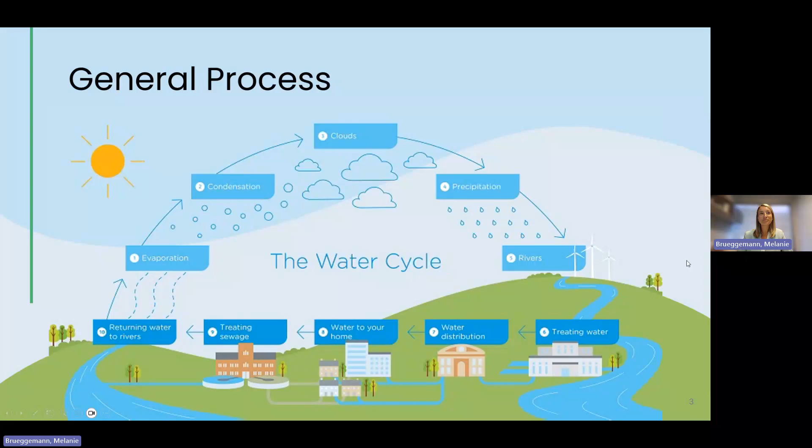When we get to water and sewer, ownership becomes a question. Most of the time our water and sewer is owned by the public, meaning the city, county, or a local authority. There are a few times we get into private ownership, such as when a developer has installed a water and sewer system for a neighborhood. Sometimes the HOA may own it, and other times the homeowner may own it, but most of the time it's public ownership.

For sewer, the homeowner owns all the way to the main line. Sometimes a utility's sewer ownership extends to the public right of way, but it can get tricky since you don't always know exactly where the right of way is, and owners sometimes dispute that. So most of the time, the homeowner owns all the way to the mainline connection.

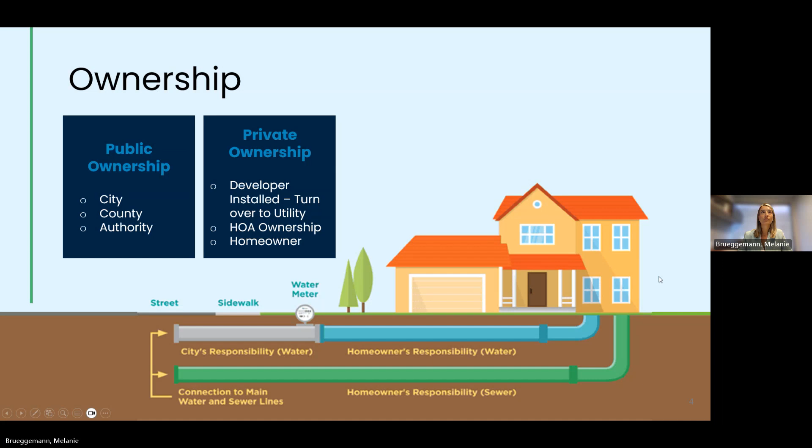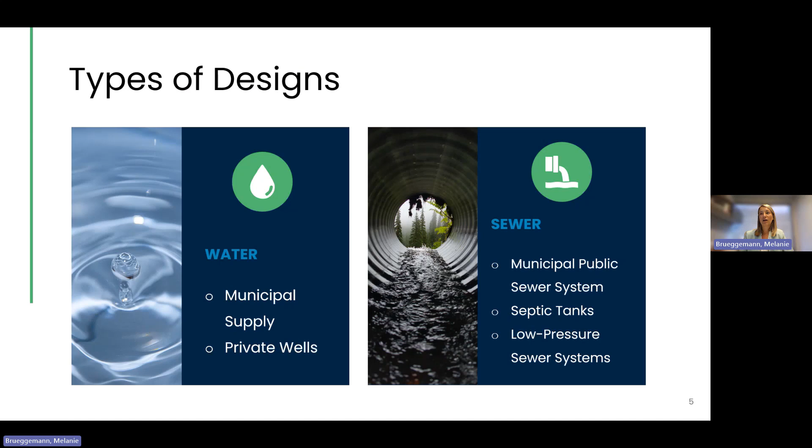Some types of designs that we'll go over include water, which is municipal supply and private wells, and sewer, the municipal public sewer system, septic tanks, and I'll briefly go over low pressure sewer systems.

When we get to the water system, there's different ways to design this and different types of designs. The first one we look at is water treatment plants. There's a lot that goes into designing these, but for the most part, most include pulling water out of a reservoir, lake, or river, and then a treatment process of sedimentation.

We are going to filter it, and there are a lot of different ways to filter the water, whether it's through old school gravity sand filters or through membrane technology, which is what a lot of people are going to. Then we disinfect the water, and it usually gets pumped out to tanks within the system, which is how it gets into what we call the distribution system.

When we're designing pumps, we need to design to meet a specific pressure within the water system. With that water system, you have two different types of pressures: one is the domestic pressure, which is what you get out of your faucet, and another is for fire flows, which is what comes out of our hydrants. So we design our pumps to meet those two pressures.

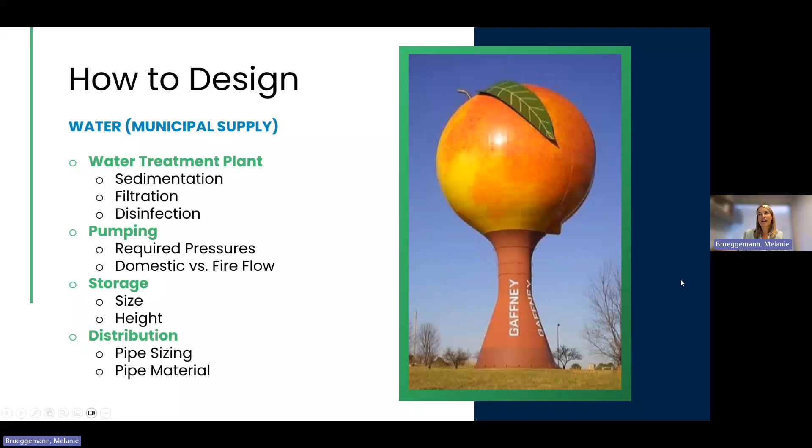For the distribution system, when we're designing it, that mostly includes all of your pipes going to the houses and maybe a few booster pump stations throughout the system. We have to size the pipes based on the amount of flow, and the pipe material is something we design, which a lot of times is based on what the actual utility would prefer. So most of the time it will be ductile iron or PVC.

Some constraints you may come across as an elected official or someone involved with water and wastewater distribution and collection systems is water treatment plants. If you plan to design a brand new water treatment plant, it needs to be located near a supply, whether that's a river or a lake. A lot of times now, if we can't get close enough to a river or lake, we're having to build very large reservoirs and pump the water from the river or lake all the way to the reservoir. For example, that just happened in Paulding County—they opened a very large reservoir.

Another thing that becomes a constraint when designing a water treatment plant is droughts. We have to monitor those and understand how we store water in a drought season. As water and sewer people, the state puts the hammer down when we're in a drought season to conserve water, and that ends up affecting your local citizens. So that's another constraint we have to look at when designing water treatment plants.

When designing distribution systems, some constraints we have are the pressures. We have to maintain a specific pressure throughout the system, and we have to make sure we have enough redundancy so that if there's a water main break, a whole county or city isn't out of water. But those are the main constraints to think about whenever you're looking at the water system.

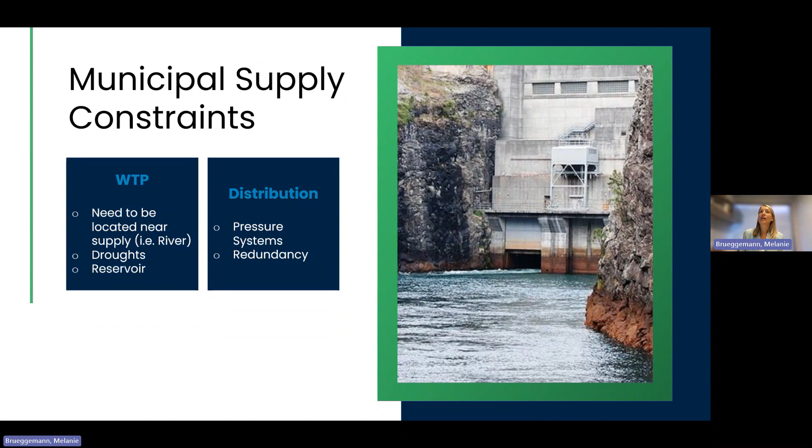Now we're going to go into water wells. Some people, if they aren't on a public water system, will have a water well. These are typically in rural areas, and they utilize groundwater with a filter casing, almost similar to a water treatment plant, but on a much, much smaller scale. So if you're in a rural area and most of your residents are on a well, this is what it would look like.

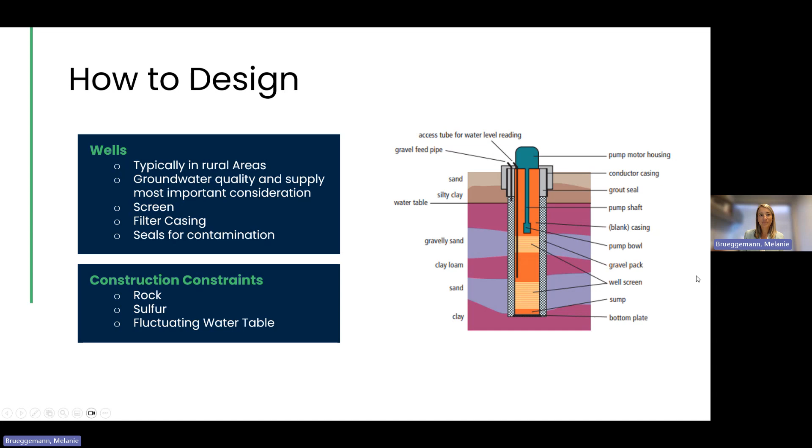Some constraints with wells are that it's really hard to dig a well when you have a lot of rock. Sometimes sulfur will make the water have a bad smell and an odd taste. And if you have a fluctuating water table, this also limits how you can get a well.

Now we'll move on to sewer. When we're designing a sewer, we look at a collection system, which is the piping that goes from people's houses all the way to the wastewater plant. We need to look at pipe material, which is mostly based on the utility and their standards. Another portion of the design is whether we're flowing the sewer by gravity or pumping it.

We prefer not to pump it, since that requires a lot of energy and a lot of operation and maintenance costs. Gravity sewers flow by themselves for the most part. If they get clogged or backed up, it just requires a one-time cleaning, whereas with pumped systems, it's being pumped all the time. The pumps get a lot of rags, or the flushable wipes that are actually not flushable, clogging them. So that becomes a little bit more difficult.

When we're designing the pumping system, we need to look at the force main. We have to size our force mains based on the flow and the velocity. We like to keep those self-cleansing, so we don't have to clean them out often.

When designing the pump station, we also have to think about rain events. Rain sometimes gets into our pipes, which is called I&I, infiltration and inflow. During rain events, our pumps at the pump stations have to pump way more than they typically do on an average dry day. So we have to design pump stations for both low flow and high flow scenarios.

Again, I&I, infiltration and inflow, we do get those in our sewer system. Everything's underground, so we don't necessarily see all the small cracks, or maybe sometimes you might get a manhole that has holes on the top. That's where we get our infiltration and inflow.

When we get to a wastewater treatment plant, we have to design for that too. It usually includes some sort of screening, which takes out all the trash, because even though it's a sewer, we still accumulate quite a bit of trash. So we typically have to screen our wastewater when it gets to the plant, and we take that trash to a landfill.

Once we get there, depending on what kind of system you have, it's typically a biological type system. We have to aerate the sewer, and then it goes to clarifiers where the solids settle out, and we get cleaner water that skims off the top. From there, we typically do disinfection before it goes back into the rivers.

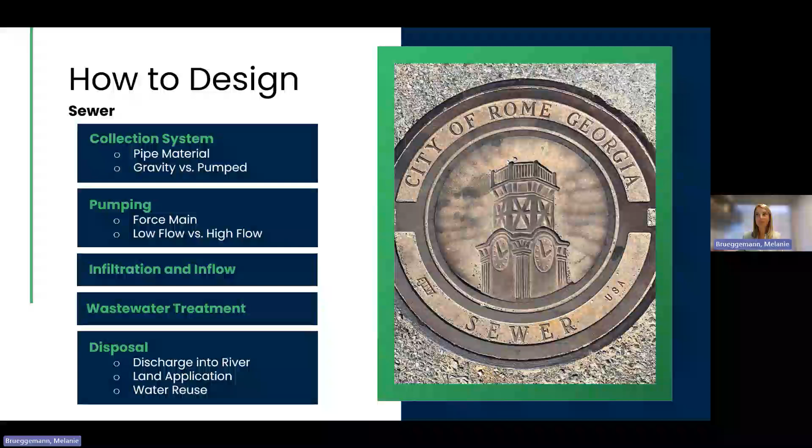Another way to dispose of the wastewater is water reuse. Paulding County, for example, has a water reuse program where they take treated wastewater and use it for irrigation in certain locations. The wastewater discharged there has to be disinfected to a certain degree for water reuse, but yes, it can go to irrigation. They irrigate a few golf courses with their treated wastewater.

Some typical constraints with sewer: your wastewater treatment plant needs to be located near a river for discharge. If it's not, then you have a really high pumping cost to pump it to the river or stream, which makes it a little bit more difficult.

One constraint most of you may know is where you place a wastewater treatment plant in neighborhoods. You have a lot of complaining citizens and residents who may not like the smell and odor, so it's kind of hard to find specific locations for wastewater plants. You also want it to be in a centralized location, and a lot of times they are located at the lowest point so that gravity sewer can make its way to the wastewater plant. But you want to make sure it's not so far away that you're pumping sewer for miles and miles to get there.

With land application, you don't want to do it if you have very steep slopes, because that creates erosion, which is not great for our environment. It's also very difficult to have land application if you have rock, because the wastewater does not seep into the ground like you would like it to.

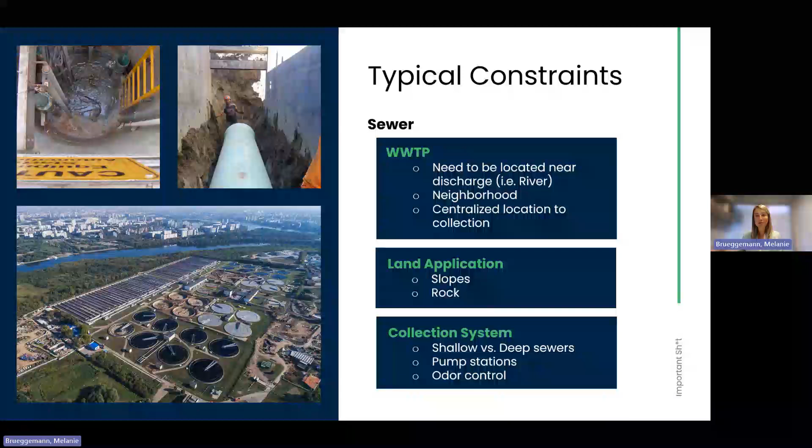Lastly, for both the wastewater treatment plant and the collection system, there's odor control - making sure your residents aren't smelling the sewer on a day-to-day basis in your sewer system.

Real quick, I don't want to get too in the weeds, but when we design a water and sewer system, we're designing it based on some assumptions. For the most part, we're designing water based on what our residential flow rate is, which is a gallon per day per capita - essentially per person. We also have to assume how many people are in each household. There are a lot of assumptions there, but some people have very sophisticated, existing data we can use. It used to be 100 gallons per day per capita, but it's starting to look closer to about 67 gallons per day per capita, based on low flow toilets and all these water-saving technologies.

Fire flows - a lot of times we're designing based off of the design constraints: 500 gallons per minute in rural communities, 1,000 gallons per minute in urban communities, and 2,000 gallons per minute for large developments or industrial sites. We have to have a design fire flow at that rate for an hour.

Sewers, we typically design them to be 60 to 85% of the used water, knowing that pretty much if you're at your house and you're running your dishwasher and your sink and your laundry, that pretty much all of that water goes to the wastewater system. So you're only consuming about 5 to 10%.

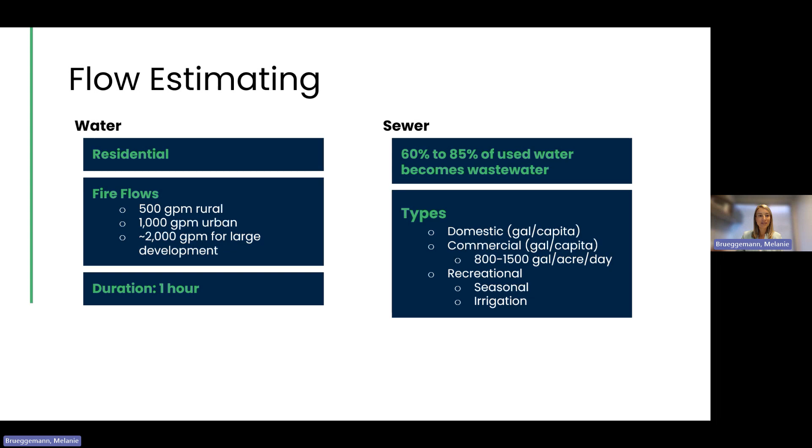A few other design considerations to think about is permitting. If you are doing a water or wastewater permit, you do have to get the withdrawal permit or a discharge permit, and those take a very long time to get from Georgia EPD. There's a lot of testing of the rivers and lakes that you're pulling water from or discharging wastewater to, so those do take a long time.

We do have to make sure that when we're doing any clearing or anything like that for our projects that we're looking at protected species.

GDOT permits - if we're putting anything in GDOT right of way, we have to get a permit for those utilities. Creek crossings, we have to get specific permits from United States Army Corps of Engineers for that. And all of that takes a lot of time, and we have to coordinate with other utilities like Georgia Power and AT&T Fiber - you're always having to work with other utilities since it is kind of a mess under the ground.

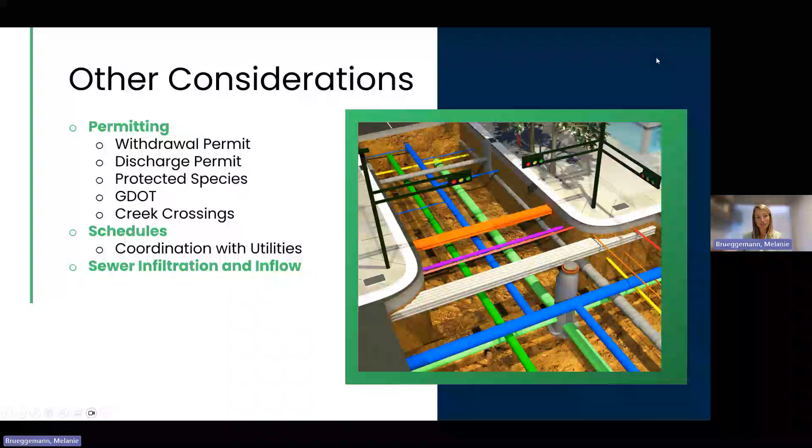And then sewer infiltration and inflow, we're always kind of having to deal with that as our infrastructure ages and we're having some more issues.

So some big takeaways: you need to understand your local planning - who owns the water and wastewater system, whether it's your state, your county, or your local authority. And if you are buying or selling water to other communities, you might need to know who's involved in where your water supply is coming from.

We have to utilize accurate capacities. So if you're planning a community or planning a development, or know that there's areas of your community that might be growing or developed, kind of converting that land planning into water and sewer planning - understanding, is this going to be an industrial site? Is this going to be a residential site? And then planning accordingly for that.

And then review constraints. Sometimes I get a lot of land planners that will want to go up and say, oh, we think that development would be great in the north part of the county. And I'm like, it's completely all rock up there, so it would be very expensive to get water and sewer up there - that's just not going to happen. So kind of understanding your geological constraints, the location of your water and sewer system, permitting constraints, topography, and capacity of how much water and sewer is actually available from your utility to serve those areas.

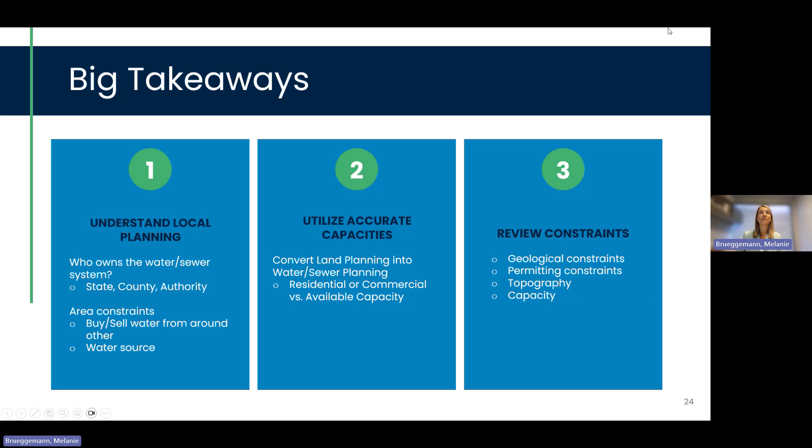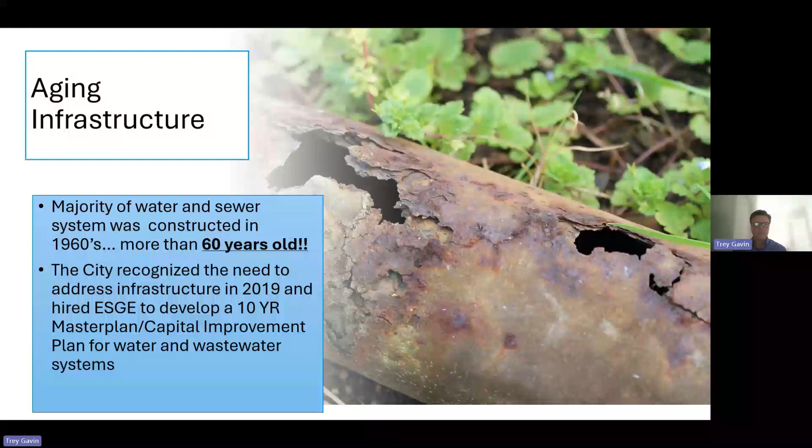The city recognized the need to address this snowballing infrastructure situation around 2019 and worked with ESG Engineering to develop a 10-year master plan, capital improvement plan for water and wastewater systems. This does jive with some of the comprehensive planning that the city and Ware County had joined together for, both a regional water plan and the updated joint comprehensive plan.

You can see here planning concepts that moved into proposed projects within that plan were hitting all around water, wastewater, street and drainage, so we would start to address some of the capital improvement program items that were listed. We continue to address deteriorations and make capital upgrades, ensuring community facilities have adequate water and wastewater. Additionally, there was a goal to extend water, sewer, and other utilities to the industrial park and other areas suited to economic development. So we did have an economic development driver as well within the planning.

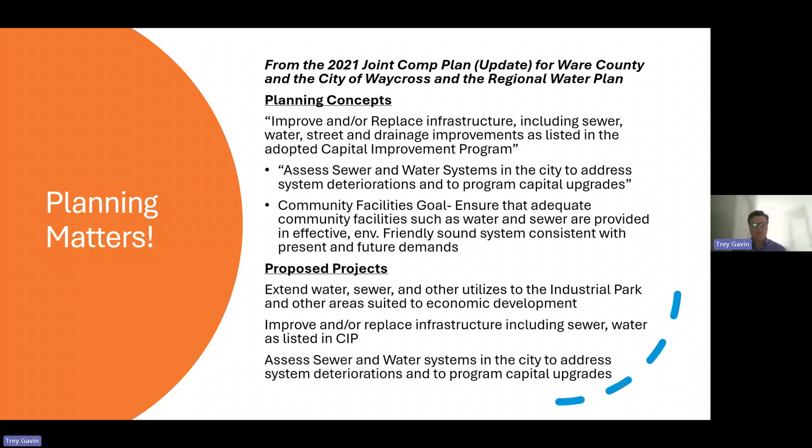The city has had a declining population for quite some time, and so there's not a whole lot of focus on growth. We had a couple of growth slash redundancy measures here, but looking at potential regulatory issues we might be facing over the next 10 years, plus looking at concepts for rehabilitating many systems in need. We also had a yearly rehabilitation budget built in, whereby we would start to address old hydrants and valves, replacing those for obvious reasons, and also infiltration and inflow reduction projects, which Melanie described very well a bit ago.

We all know that these systems aren't getting any better with time. We've just got to start addressing this on an ongoing basis, either on an annual budget perspective or as a big capital project. So in this case, we kind of programmed it with all the other needs - we programmed these particular needs like an annual budget.

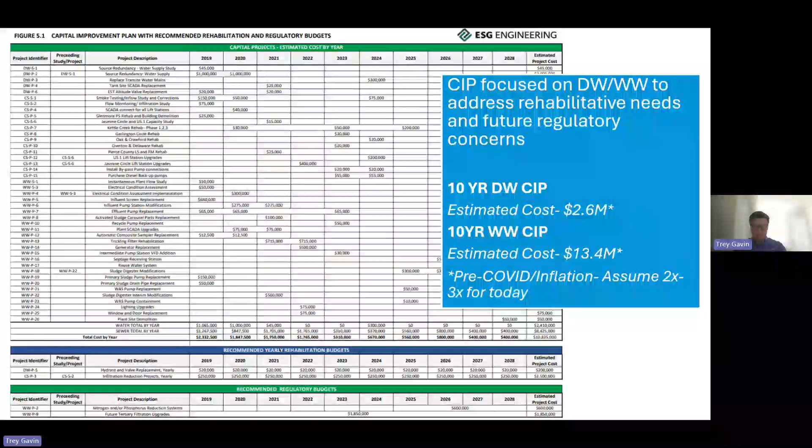So the key projects that came out of this exercise that were high priority for us to face, both from a technical perspective for engineering and also from a funding perspective - planning's finished, now we're into the nuts and bolts of how to make it happen.

On drinking water, an interconnecting pipeline between what we call the city system and the industrial park system that would provide source and delivery redundancy was a key project on the drinking water side. For this particular project, we have two different permitted systems that are disconnected by several miles.

In this case, we recognized the need to move water back and forth rapidly and provide redundancy and additional source water capacity to the city system. This project was planned as a high priority: expand source water capacity through a new well field, SCADA improvements, and an ongoing effort to replace undersized and leaky mains. Both capacity and non-revenue water losses are issues, tracking mostly with mains that are still asbestos cement, which we want out of the system, and galvanized pipe, which many cities and counties suffer from.

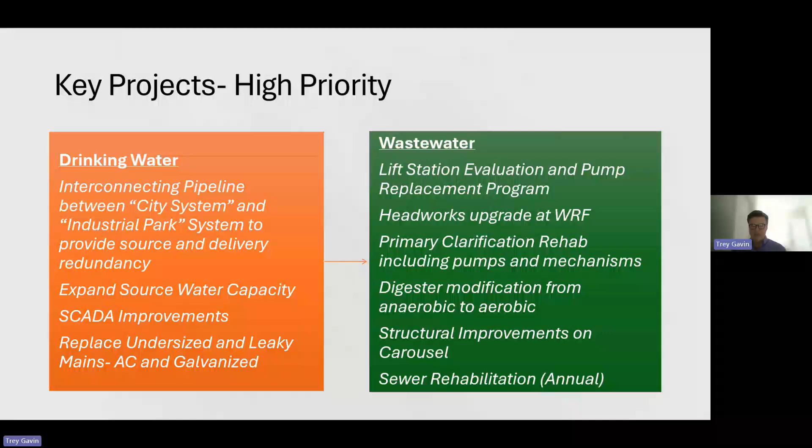Our funding strategy was a multi-year, multi-tiered process that started in 2020 with a pre-application. Many of you have utilized GEFA funding, and if labeled as a disadvantaged community, hopefully you've received principal forgiveness. You can see the projects listed on the right-hand side of this table. The big takeaway is that our specific strategy led to $5.625 million in grant funding for $12 million worth of work, which is pretty amazing in this marketplace—about 45% grant coverage—again addressing the highest priority projects determined from the planning process, which is key.

ESG Engineering also completed a rate study that included both a rate increase recommendation and some impact fees—a dirty word in our business, but really system development charges—that would give the city, as it grows, which has happened in recent years, the ability to offset some capital costs through a system development charge process.

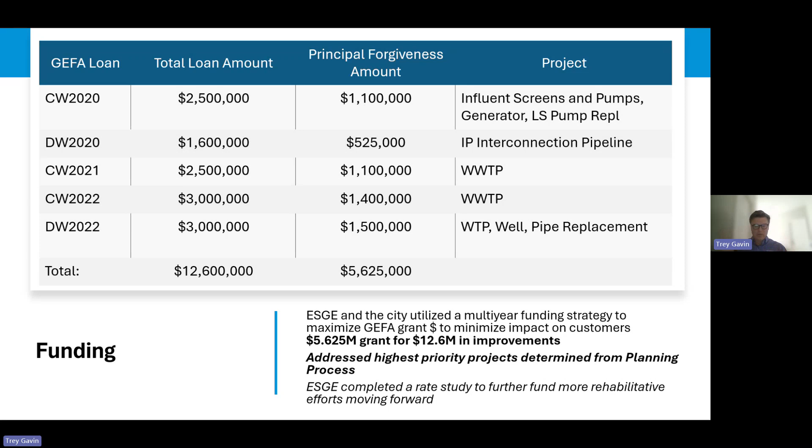Project status, a quick update: the interconnecting pipe and pump design is complete, and we're hoping for a bid opening soon in Q3. The wellfield expansion and water treatment facility rehabilitation design may be starting soon. On the wastewater side, 2 of 3 phases of the wastewater treatment facility have been improved and rehabilitated; we're moving through the last phase now and will be ready to bid that. The lift station evaluation and pump replacement project is complete.

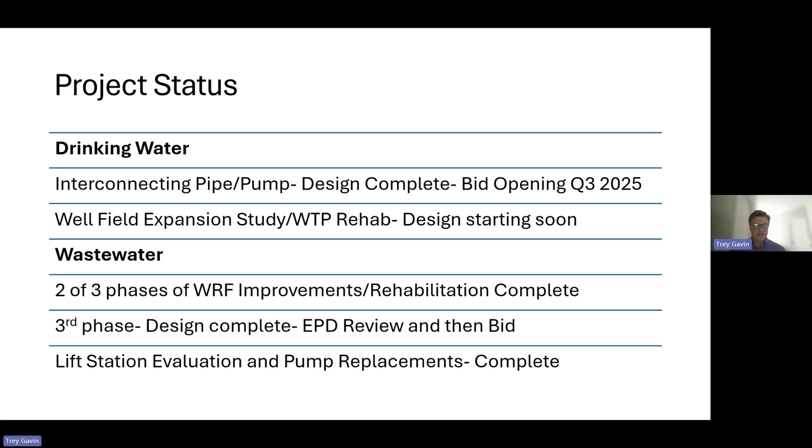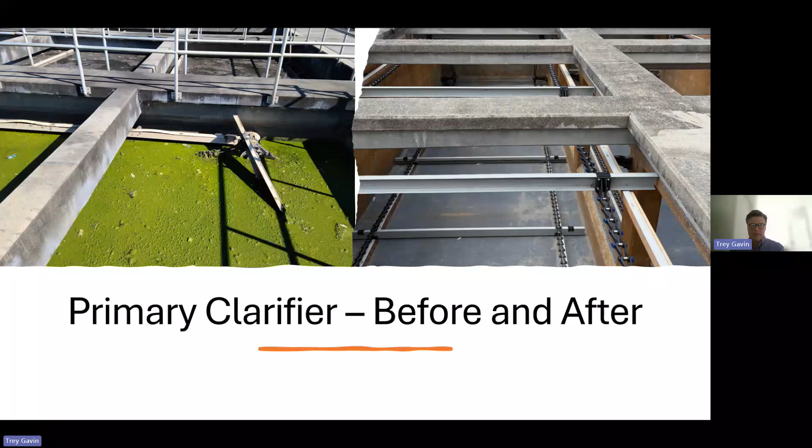Just some quick before and after pictures. The primary clarifier pictures look bad because it was out of service and left sitting, but it's a very nice rehabilitation—non-operational to now operational. This shows some of the work going in: new generator, new screens that made a huge difference to the wastewater plant, fine screening, head house and digester piping replacement, and new conduit duct bank.

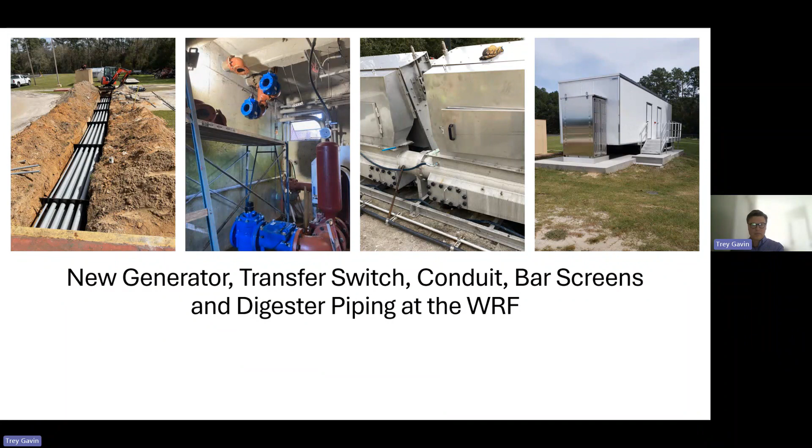Challenges we faced on these projects: COVID-19 made things very difficult, both from typical bottlenecks everyone recognized, and from the inability to get labor to the job site for bid day. We bid it three times—the first two had no takers, and on the third we finally received bids from two contractors. Really tough—maybe my hardest bid day challenges in my 28-year career.

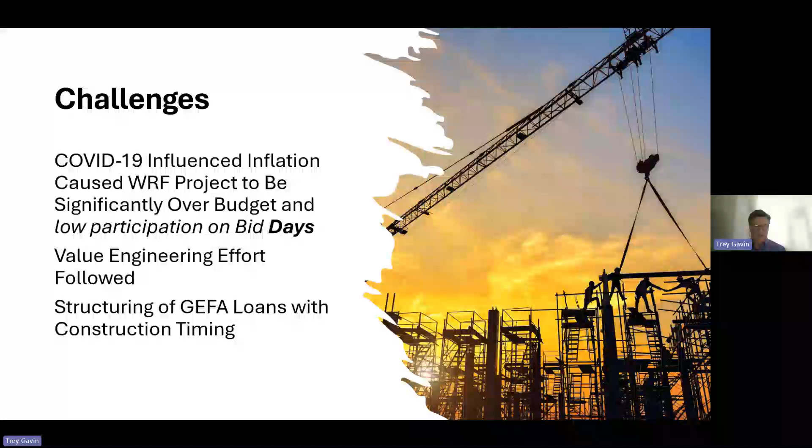The value engineering effort came after we busted budget due to inflationary issues at the time on the first two phases of work. We did value engineering and got the project flowing again, now set up for the third phase within an overall budget structure. The GEFA loans—doing work at the wastewater plant through three different GEFA loan and grant combinations—provided challenges on construction timing and usability of funds.

Our overall takeaway from this effort with the city is that the comprehensive planning process worked. Our community partners—whether GEFA, the South Georgia RC, or the DCA initiative through the Plan First community concept—helped us construct meaningful projects for the city of Waycross, and a lot of these are still ongoing.

Probably we'll have an update to this capital plan in the next year or two, trying to keep up with it. The overall takeaway from this project structure is that this overall effort supports the regional initiatives for growth and economic development. We're always trying to have better facilities, more reliable facilities, and more redundancy, and this one checks all of these boxes along with supporting economic and regional efforts.

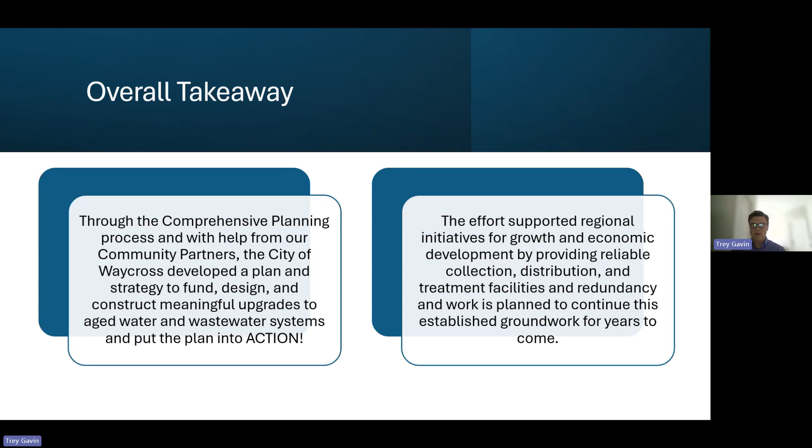And then just to talk about our city partners, as I said, DCA, South Georgia RC, GEFA all participated in some way. We were the engineers. Inframark operates the wastewater and water facilities for the city of Waycross. And of course the commissioners, Mr. Rayford the city manager, the planning department with Mark, and the mayor have all been big supporters of this work. We're awfully proud of being involved and continuing to promote the city of Waycross across the region.

That's great, Trey. Really appreciate you speaking on that. Great projects. I'd also just like to put a fine point on unashamedly plugging the Plan First program, which is another program that I manage.

The numbers that I have on two of the loans from GEFA, as DCA shares a strong partnership with the Georgia Environmental Finance Authority, we have offered a 0.5% reduction on GEFA interest loans. So what I saw was that out of the two loans of $3 million over 20 years, that 0.5% reduction, because Waycross was a Plan First community, they're saving roughly $164,000 over 20 years, and that's real money. If you're a planning director, that's certainly more than your salary. Great job with the city of Waycross partnering with the Southern Georgia Regional Commission in accessing that Plan First incentive, and great job to you, Trey. Thanks for explaining what you guys have done, really improving the water quality over there in Waycross.

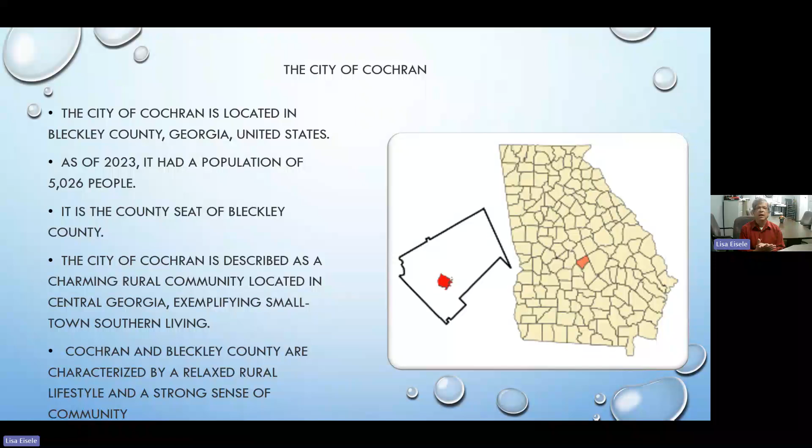A little bit about the city of Cochran. We're located in Bleckley County, Georgia. We're about 40 miles southeast of Macon, about 30 miles west of Dublin, really just south of Warner Robins. We're a little over 5 square miles, with a population of a little over 5,000 people, and we're the only incorporated city in Bleckley County. We're a charming rural community with a relaxed rural lifestyle, yet we have our challenges with water and sewer.

Similar to Waycross and other municipalities that have reported, we have a waste treatment facility where we've had a great deal of inflow and infiltration. But a little bit about our plant: it's a modern tertiary plant built in 2002. We process about 430,000 gallons per day. We have SBRs, or sequencing batch reactors, filters, and we do have UV disinfection on site. That was installed about 10 years ago.

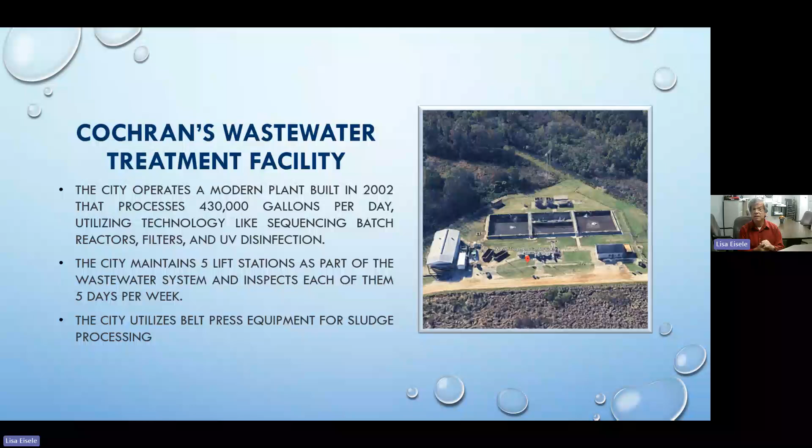We maintain 5 lift stations as part of the wastewater system, and we inspect each of the lift stations every morning, 5 days per week. Our dewatering is through a belt press. We don't have a screw press, but we have a belt press that we use for dewatering.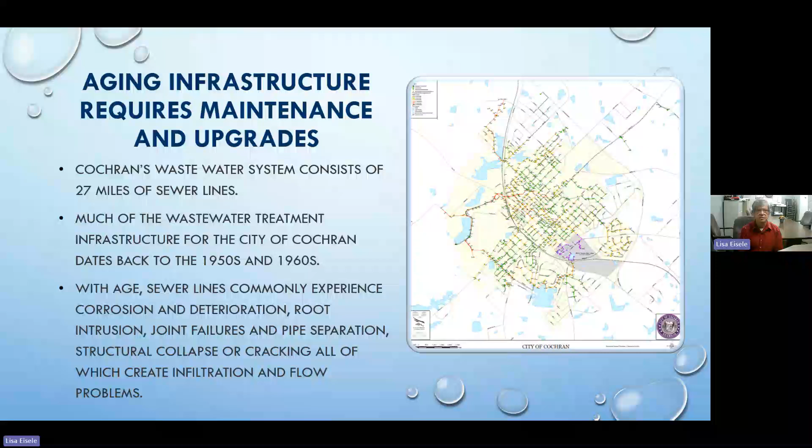Total in Cochran, there's a map of the city. We have 27 miles of sewer lines. Much of the waste treatment infrastructure, similar to other cities, was built in the 1950s and 60s, not too long after World War II. With age, sewer lines commonly experience corrosion. We've had joint failures, pipe separation, and just like the picture from Waycross, just a deterioration of our sewer lines. And so we really have grappled with how to best approach this.

It's been a goal in our community work program in our 2016 Cochran-Bleckley County comprehensive plan, and then again in our 5-year update in 2021, to conduct and repair our sewer system.

In 2018, the city of Cochran completed a comprehensive condition assessment of all 27 miles of sewer collection in town. Falcon Design and Consultants, out of Stockbridge, have been our consulting engineer for a little over 11 years.

We did a complete comprehensive condition assessment. It was a very thorough assessment of the location of all our manholes and the condition of our sewer lines. I know in city of Rome it was reported earlier that they discovered holes in manhole covers. Well, in the city of Cochran, I don't like to boast, but we discovered some manholes we didn't even know about. There were a couple that were surprising.

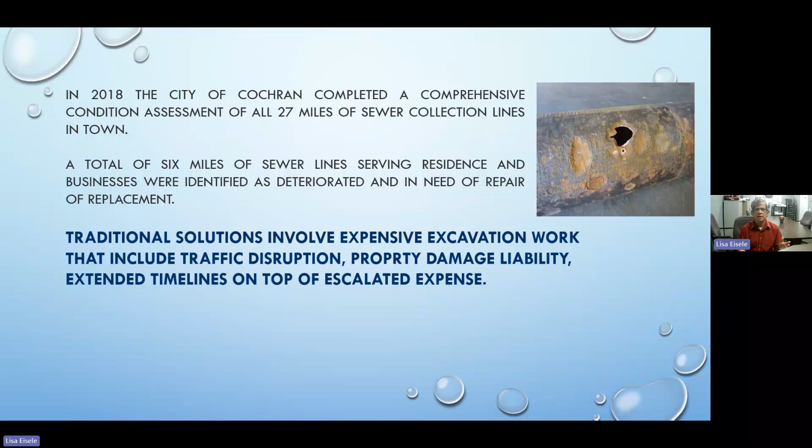We identified 6 miles of sewer lines serving residences and businesses that were deteriorated and in need of repair and replacement. So we looked at traditional work of replacing the lines. That's a lot of excavation, includes traffic disruption, property damage, and a lot of expense.

But then we pursued what has been around for a while now, slip lining and cured-in-place pipe. This isn't new among cities and counties, but it was new for the city of Cochran in 2018. We pursued the trenchless pipe rehabilitation method, approaching it as a geothermal compound that would be pumped into the deteriorated sewer lines.

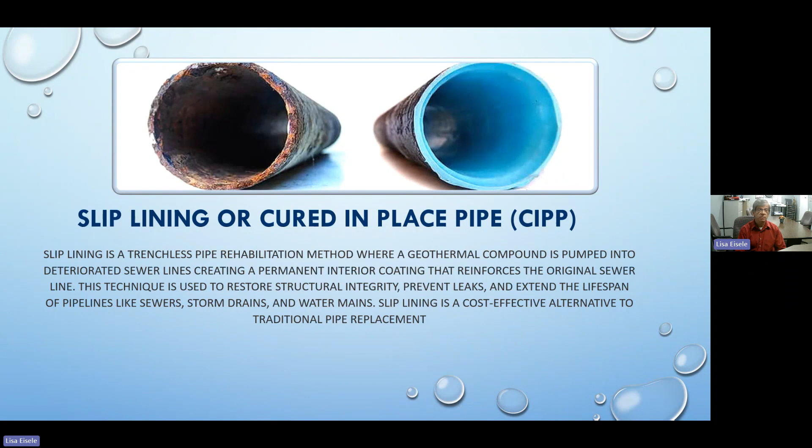We put together a budget and made a proposal to GEFA, Georgia Environmental Facilities Authority, and obtained a $2.5 million loan to finance this and other infrastructure improvement projects. The loan was given at a 1.3% interest rate to be repaid over a 20-year period. We did enjoy loan forgiveness, not as much as the city of Waycross, but we did qualify for a 20% forgiveness.

So you may hear about GEFA, they do offer grants. Well, I learned that it's really a grant on the back end in the form of loan forgiveness, but it still was a big advantage to us. That 20% loan forgiveness was really a grant to the city.

We bid it out. Falcon Design actually assisted us with bidding out the slip line proposal that was funded by GEFA. We received 7 competitive bids and decided on the contract with the Renee Group out of Atlanta to actually do the slip lining. You can see some pictures of the Renee Group in town, actually pumping the geothermal substance compound into the city's most deteriorated sewer lines.

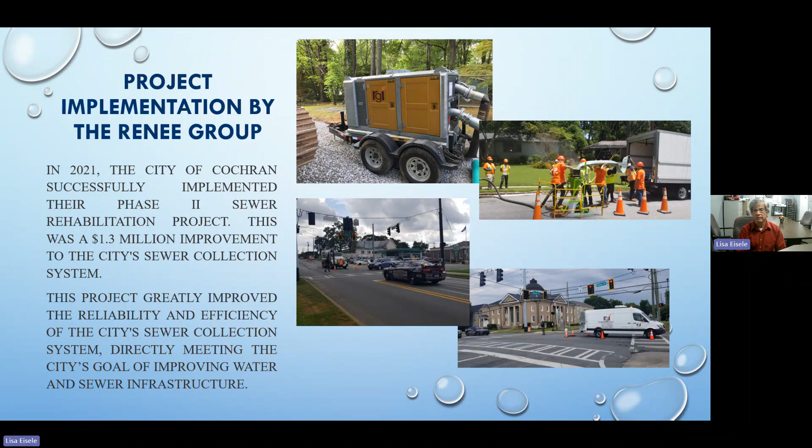It was over a period of probably 3 to 4 months, about 3 months actually, where they did the work, and it greatly improved the reliability and efficiency of our sewer collection system. That was our goal, to improve the functioning of our sewer collection and reduce the inflow and infiltration. We were able to accomplish that through this project.

The city leaned on combined efforts of different organizations. We collaborated with Falcon Design Consultants, who helped us with the design and inspection throughout the process. GEFA, Georgia Environmental Facilities Authority, has been a great resource to the city with regard to financing. The city council, the mayor and council of the city of Cochran, we appreciate their leadership and interest in making this program work to improve our sewer collection capacity. The City Public Works Department has also helped us.

The Renee Group did a great job with this project, so it was a great program. We're still enjoying the benefits of it.

Now I do want to mention Plan First. We were a Plan First community. We became Plan First after GEFA awarded the loan, so we didn't enjoy that 1% reduction in the loan. But Plan First does come in handy. We've actually taken advantage of Plan First with our downtown businesses, the Downtown Development Revolving Loan Fund. That reduction in the interest rate has helped several businesses down in downtown Cochran.

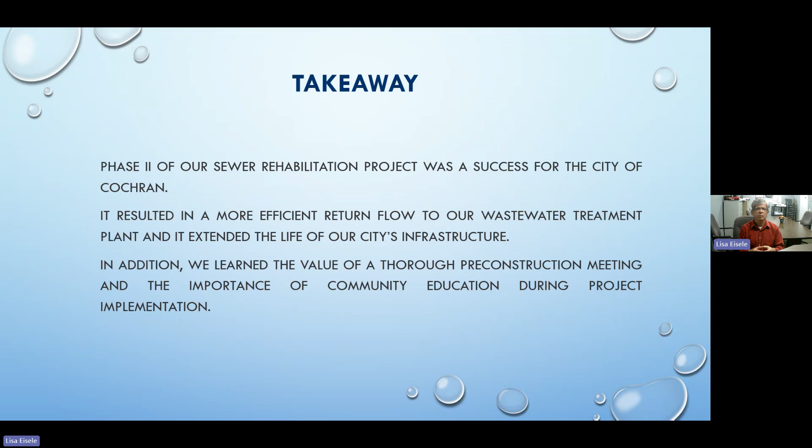We did have a lot of community support. I think by notifying different neighborhoods exactly where the contractor would be, that's an important element of getting the project done. Now, we have ongoing efforts with our sewer system funding.

In 2024, last year, Senator Jon Ossoff secured a $700,000 grant through the congressional budget allocation to be used for wastewater improvement projects. It includes our major lift station at our treatment plant, and that lift station is in great need of repair. So that grant is going to help us out tremendously, as well as we're going to put our belt press in the blower house to protect it from the elements.

So ongoing, we're seeking funding to improve, preserve, and service our sewer system for the benefit of the citizens. So that's our presentation, Daniel.

Thank you, Richard, nice job. Really enjoyed that. Thanks for the plug on the Downtown Development Revolving Loan Fund, that's great, love to hear that. Yeah, and so this goes to show you that a size city similar to Cochran can be innovative, and you guys have done a really great job with the slip lining and really ensured the future water supply is going to be strong, and you're going to be confident in your water supply moving forward for decades to come because of this.

Perfect, perfect. Like Daniel was saying, my name is Kisha Moore, I work for the Northwest Georgia Regional Commission. We cover 15 counties and 48 municipalities, Dallas being one of those. Amber's here to chime in anytime — this was her project, so I hope I do it justice for her.

A little bit about Dallas: it's 38 miles outside of Atlanta, Georgia, in Paulding County. As of 2024, their population is approximately 15,000. Some historic things around Dallas include the Dallas Theater and of course the Silver Comet Trail in Paulding County as well.

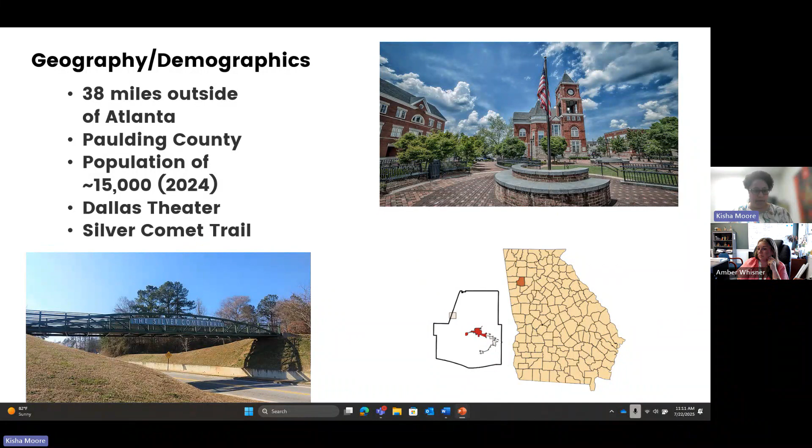So what is advanced metering infrastructure? AMI, as I'll refer to it, is a system of water meters and remote data collection services — a network system that provides two-way communication between utilities and customers. It can detect and diagnose leaks, schedule conservation programs, and improve customer service all around the board.

It's real-time usage at the meter, and they can notify customers of leaks within days or weeks of onset. It's also educating customers on conservation as well.

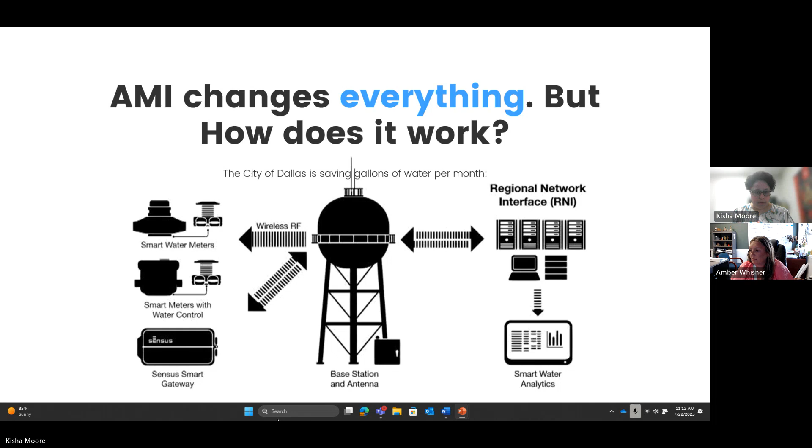So why AMI? It gives customers more accurate readings on their water usage. The city of Dallas has the ability to alert customers when there's a problem, and it provides a more sustainable measure for the environment. It also allows customers to handle any problems before their 30-day bill comes — if they have a child taking too long of a shower, or a leak, anything like that, this prevents it.

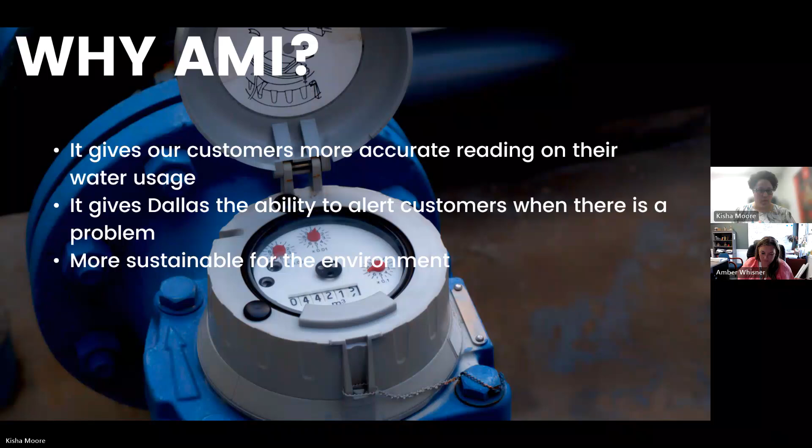I want to talk a little bit about their comprehensive plan. As we all know, when applying for funding, it's important to have it in your comprehensive plan. The City of Dallas had water quality and water conservation mentioned in their last several Paulding County comprehensive plans, which gave them the flexibility to pursue funding options, one being AMI. Proper planning is necessary for a successful project, and I think we can all agree on that.

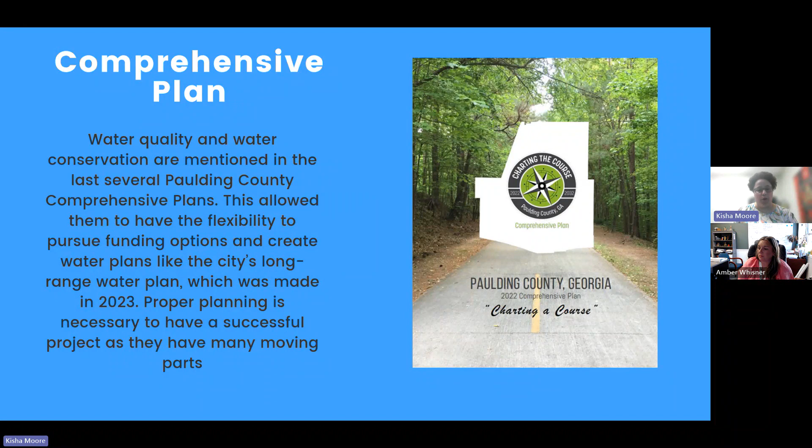Here's an overview of the City of Dallas's water system: 38 miles of water line, 3,700 water connections, and a population of about 14,000 to 15,000. There were 21 county interconnections of water purchased, and 3 wells. In 2016, the total water supplied was 205.733 million gallons, with real water loss and apparent loss also noted.

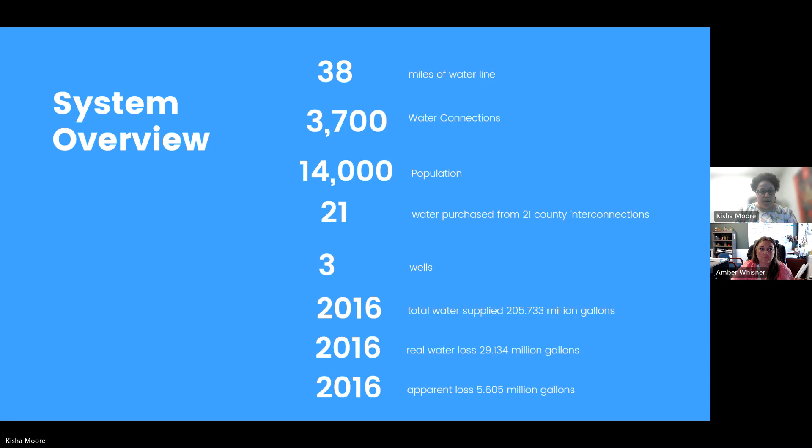So when they had their audit, it made it very clear that there were flaws in the City of Dallas's system. They scored a 64 out of 100 on their audit score. Their net loss was about 31.34 million gallons per year, and you can see that charted in this slide.

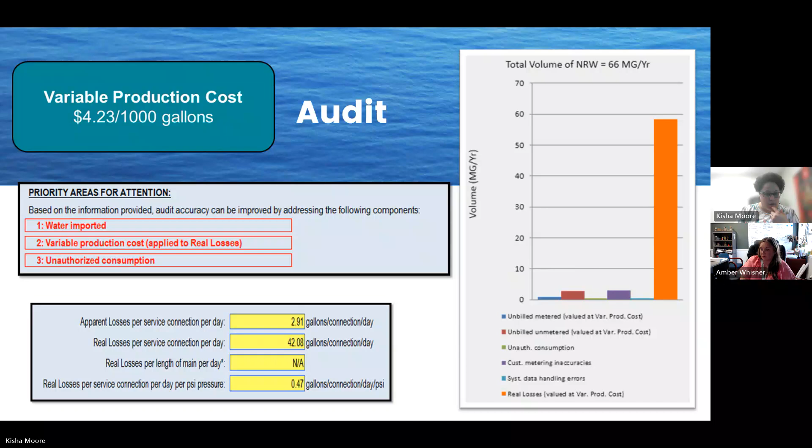So what does the audit tell us? More particularly, it asks us: am I losing revenue? Do I know where the loss is? How can we gain revenue?

This shows a blueprint of the water system. As you see at the bottom, this is their audit score, 64 out of 100. How much is leaving the system? And these are things in the audit system that can help improve the system.

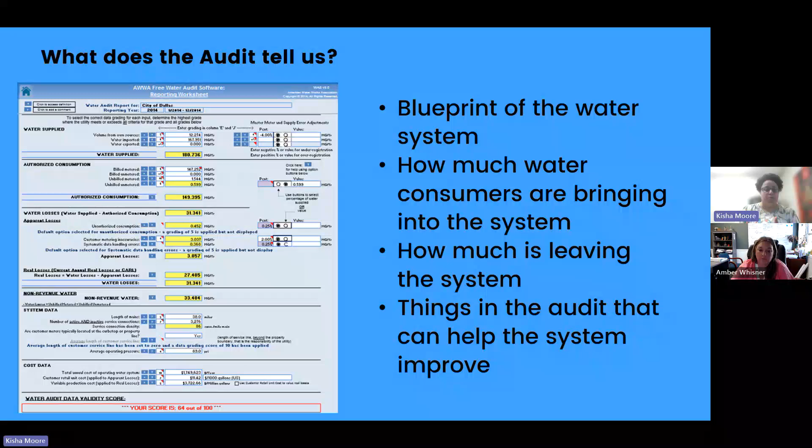So the City of Dallas implemented a zone water loss program in 2024, and that motivation was driven from the results of their 2012-2013 water audit. The City of Dallas wanted to minimize the amount of water lost in the entire system, and the complete system was separated into zones. Each zone was based off of data, development variability, and the ratio of loss per address.

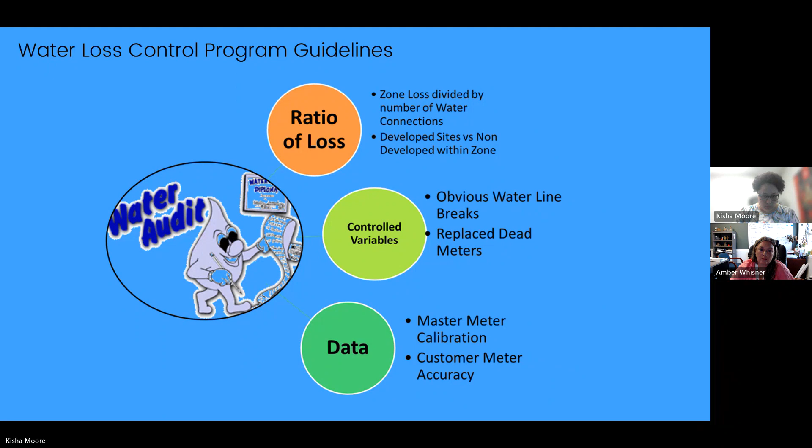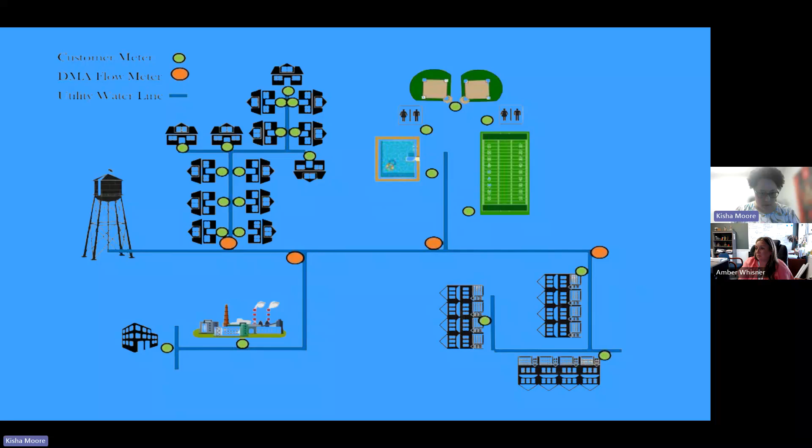So these are the types of losses that we have here: real losses and apparent losses. Real losses are pretty self-explanatory, caused by physical losses of water - typically what happens when your child's taking too long of a shower, or a leak in someone's house or in the water main. That's the real loss. The apparent loss is meter under-registration, water theft, or billing errors. So those are the differences between the two.

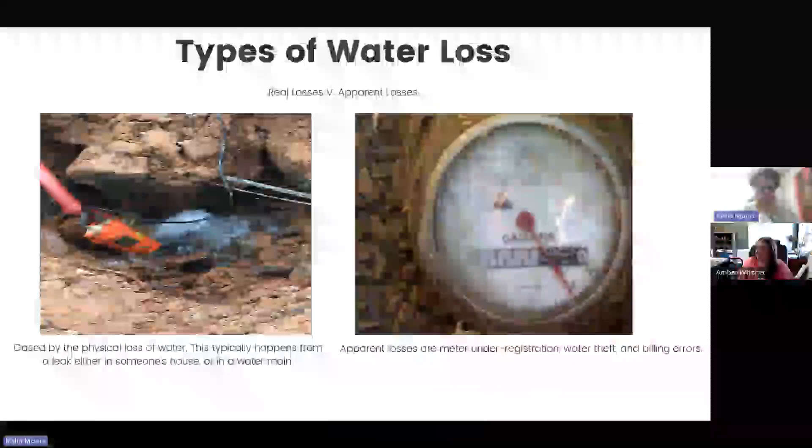So Dallas put in a meter replacement project. The project began around 2015. 12 to 15 years is a new meter life cycle. Between 2018 and 2020, all meters were replaced during this time and were fully operational on the AMI system. And their next phase, they're going to be doing a meter replacement program in 2027.

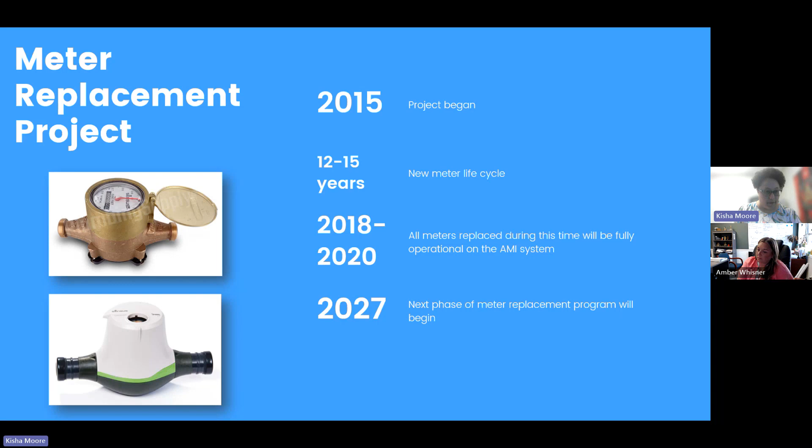So this is kind of a breakdown of what the City of Dallas sees on their end. The system automatically alerts to potential leaks in the district meter area. It also alerts to high flow areas, places where the meter's fallen out of communication with the system, all those kinds of things. So it's very handy to have.

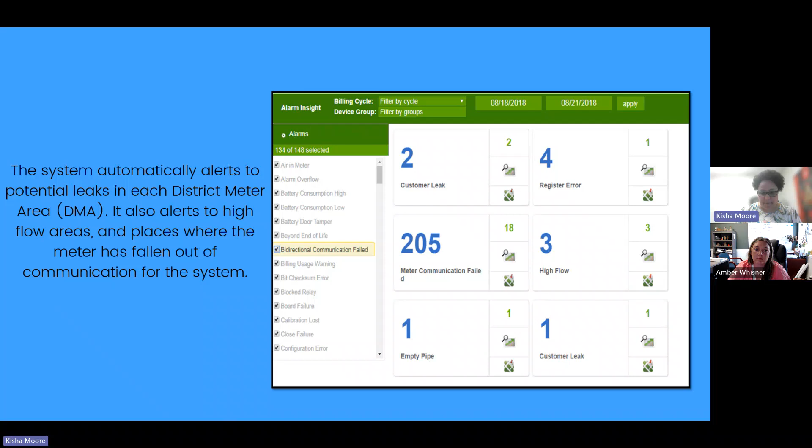So some of the corrective actions taking place in the City of Dallas: we have meter testing, done on a regular basis on both the older meters that have not been replaced yet, as well as the new electronic meters as a precaution. Leak detection - as these DMAs are completely transferred over to AMI, leak detection should be done more frequently. Pressure management and monitoring - they will set up pressure monitoring areas in each DMA using Sensus products that connect with the AMI analytic software so that regular monitoring and management can take place. And then they will utilize the component analysis tool through the American Water Works Association for additional steps and courses of action.

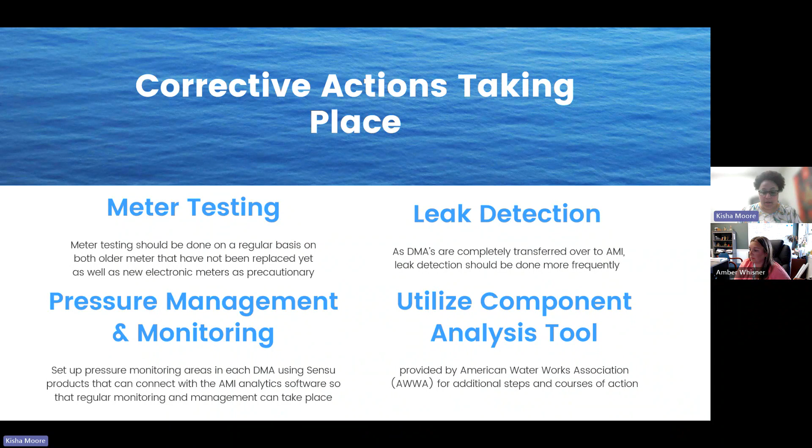So the City of Dallas has had much success with this AMI infrastructure in their city. They expected to drop water loss from roughly 47 million gallons per year to less than 10 million gallons per year. So it's a pretty awesome system they have in place there.

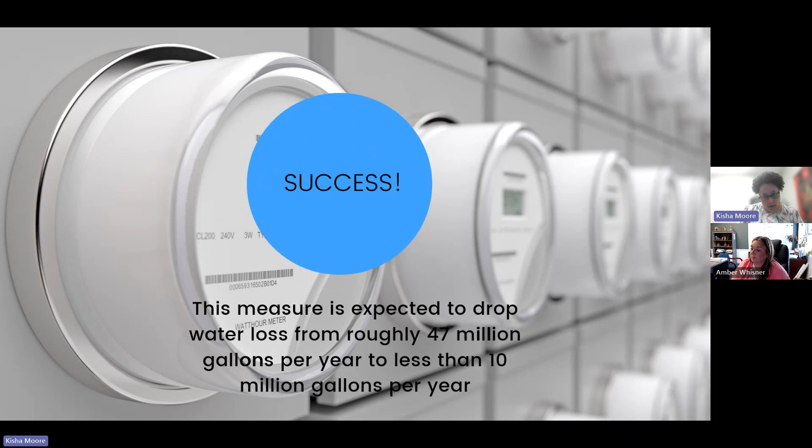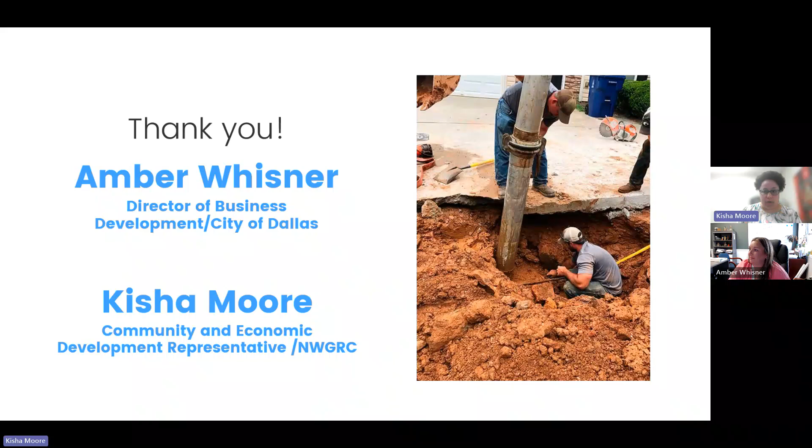Kisha, thank you. Amber, anything on your end? I will add just a few. Great job, Kisha, on presenting that. Man, 10 years - that went fast.

So the majority of that presentation was when we first started AMI. I would just like to jump forward to 2024, where we were supplying 328 million gallons of water with over 4,000 water customer connections. So all in all, we are 100% AMI. We put that in place to prepare for the future, and it did exactly what we thought it would do.

When a plan comes together. Absolutely, and that was a big plan, for what I still consider a small utility. I always say small utilities can still do big things, you just got to have the right plan in place. So that's one of our prizes we have, a lot of us worked to make that come together and be fully operational.

I'll add to this because I know some of the other presentations talk about grants and funding. We self-funded that entire project in-house. So just by doing it in phases, replacing the meters and fixing the apparent loss, we were able to completely fund the full meter replacement project, the towers, and the system all in-house.